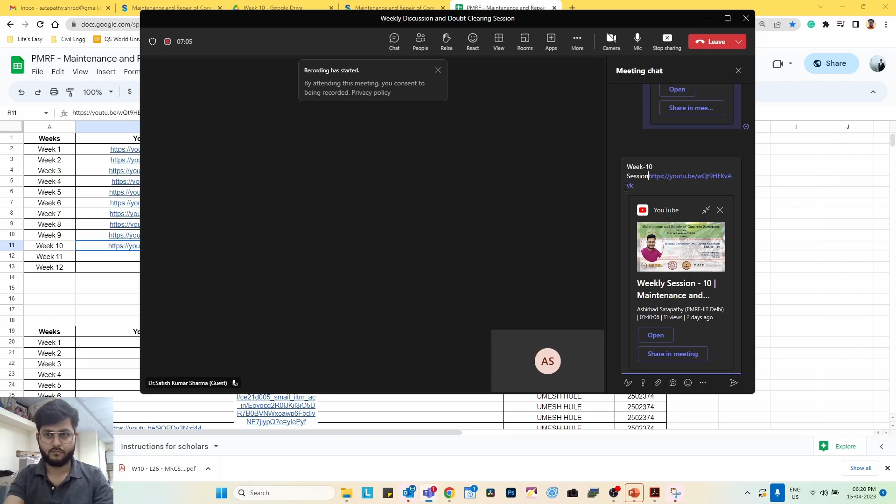Hello, Dr. Satish. Sorry we are a little late to the session. I'll allow your mic, just give me a minute.

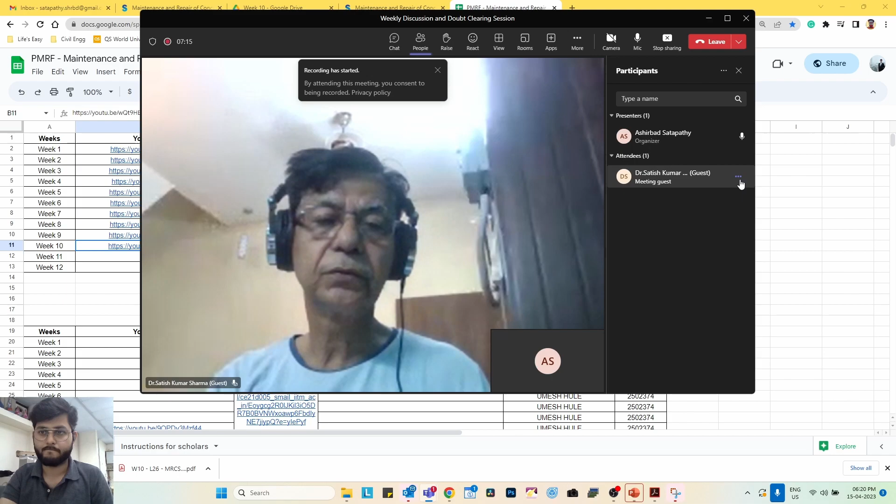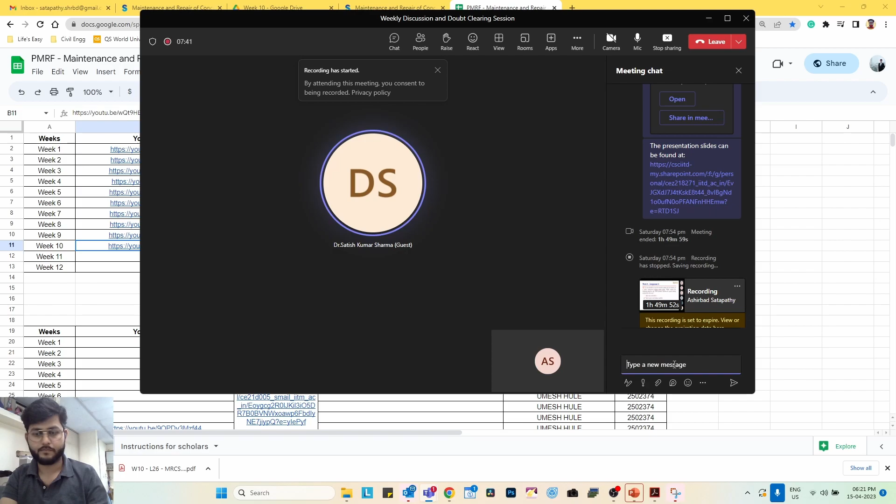Yes, Dr. Satish, I've allowed your mic. Good afternoon. Sorry we are starting this session a little late. Is my screen visible to you? Yes, visible. Okay, I'll start right away.

This is basically meant for transfer of high vertical shear loads, so the first option is correct. The second one is not correct because vertical movement cannot be allowed. They prevent excessive stress in the slab by allowing independent longitudinal movements - yes, individual longitudinal movement doesn't disturb us. They prevent excessive stress in the slab by restricting independent movements. So these two answers are correct.

This is the typical schematic representation of a dowel shear bar that is given between two successive concrete castings. So basically, dowel shear bars are a form of expansion joints.

In concrete pavements, there are three major types of joints. One is a contraction or control joint. As the name suggests, in a control joint we control the location of cracking. Saw cuts or tool cuts are given to reduce the cross-sectional area, so that the crack occurs at these locations - cracks are allowed at joints.

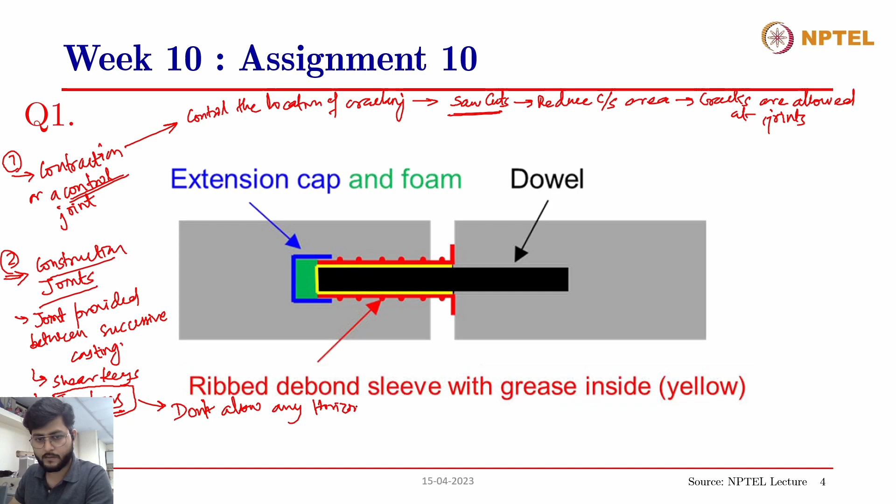Tie bars, since this is a construction joint, don't allow any horizontal or vertical movement. They prevent any differential settlement or differential movement between the successive cast members. Tie bars are simply ribbed, high yield strength bars provided between two successive elements, and they act as construction joints. The third typical type of joint provided is an expansion joint.

An expansion joint allows for movement in order to release stress. Whenever stress builds up inside the concrete due to environmental variations, like shrinkage or temperature variation causing thermal stress, we provide these kinds of expansion joints to release those internal stresses. One example is a dowel bar.

Typically, a dowel bar is what is being shown here. It allows for horizontal movement, but vertical movement is not allowed. This is a typical schematic representation of a dowel bar, and there is a ribbed debond sleeve provided around the dowel bar.

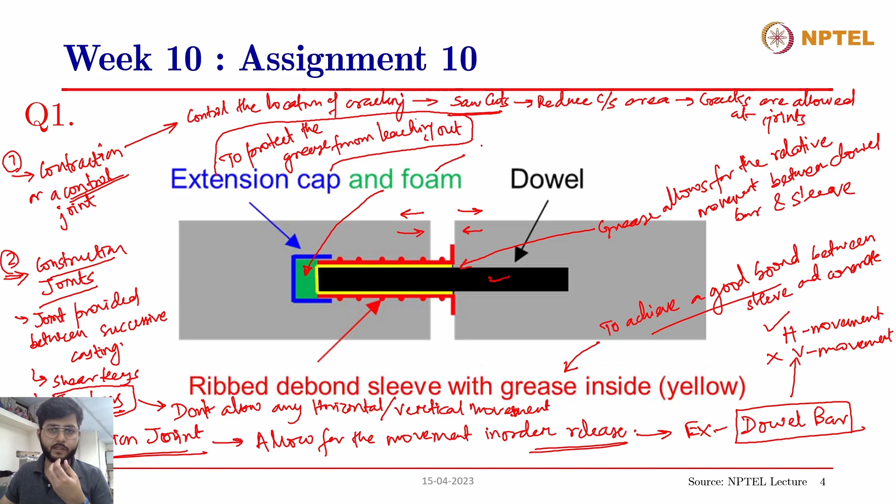Then there is a foam, this green portion, which is a soft polymeric material, like the polyurethane foams we have seen. These foams provide good cushioning beyond the rebar, so that whenever there is expansion, there is sufficient space for movement, but it also doesn't leave free space so there is no entrapped air.

Otherwise, that entrapped air, when in contact with humidity, would affect the rebar and cause corrosion. So to avoid leaving that portion empty, we apply a foam, an elastomeric material rather than a stiff one. It allows for relative movement while filling the gap, so there is no air or humidity present at that location - allowing movement while restricting humid air. This is the role of the foam.

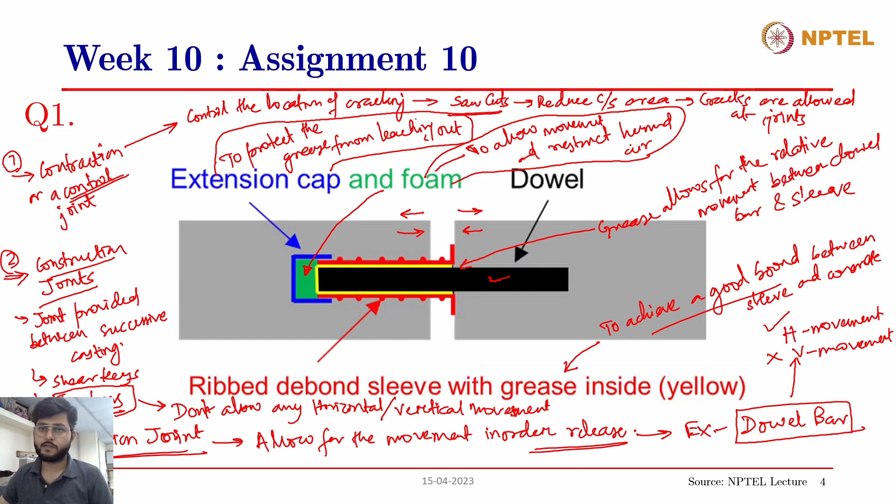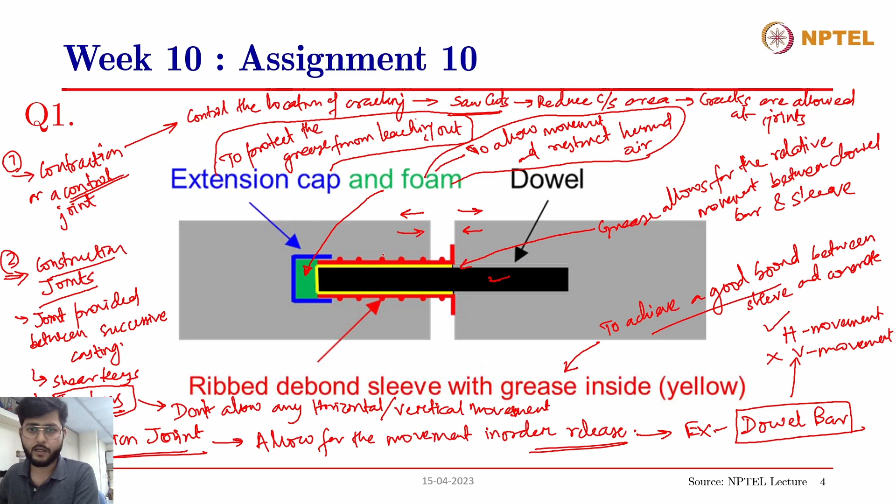So this is the typical representation of a dowel and the functioning of a dowel bar. They transfer the high vertical shear loads because they don't allow for vertical relative movement, and therefore the stresses built up due to the application of loads are shared uniformly between both the different concrete elements.

Yes, so this is a true answer. They don't allow the vertical movement. As Dr. Satish also mentioned, this is a wrong answer. They don't allow for the vertical movement.

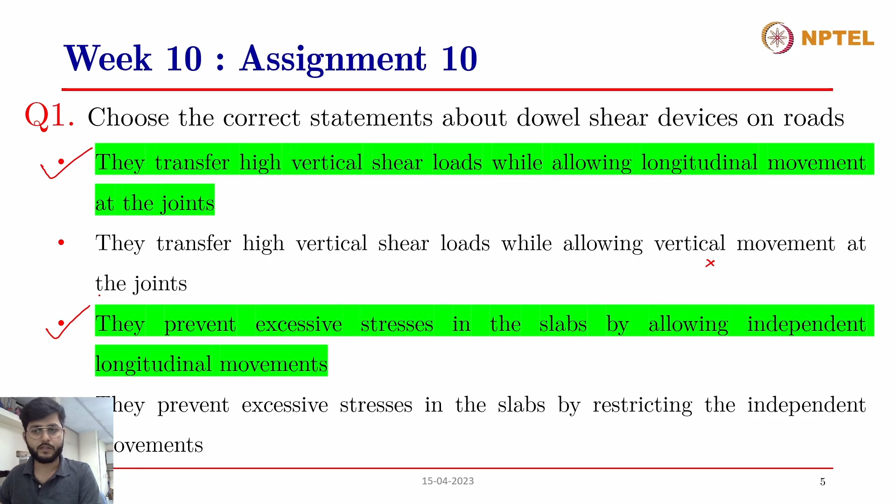They prevent excessive stresses in the slabs by allowing independent longitudinal movements. Yes, they are expansion joints, and therefore they're provided at the expansion joints, and they allow independent longitudinal movements. They don't restrict the independent movements, so this is a wrong answer.

All right, moving to the second question. As per the lecture, what are the key mechanical and durability features of a good dowel shear device? I guess we have covered most of it. Dr. Satish, do you want to answer this question? The options given, yes, you can answer this.

It has to be corrosion resistant, first requirement. Then, as discussed in the previous question, ribbed plastic sleeves with grease inside. Yes, this is common to question number one also. Ribbed dowels, no, that's right, not the intention. Parallelly aligned dowels with minimum tolerance. Yes, that is also correct. Thank you, Dr. Satish.

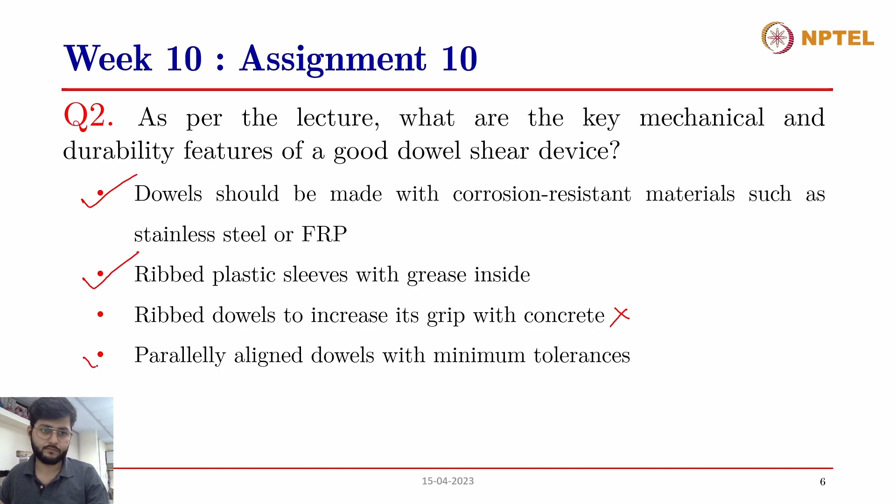So the correct answers to these questions are these three answers actually. The first statement is dowel should be made with corrosion resistant materials such as stainless steel or FRP, because we don't want the dowel bars to get corroded. Otherwise, if these rebars get corroded, corrosion products will form around them, creating expansive stresses within the concrete, and that will further create cracking.

So if I'm looking at a plan of an expansion joint, and this is a typical expansion joint with these dowel rebars, if corrosion occurs, then there will be longitudinal cracks across these rebars, and that will affect the concrete. That will further allow the ingress of water and other substances into the concrete, leading to deterioration. These are corrosion cracks.

We do not want that, and therefore we want the dowel bars to be made out of corrosion resistant materials like stainless steel or FRP bars.

Then the second thing, as we discussed, ribbed plastic sleeves with grease inside. Ribbed plastic sleeves provide bond with concrete, and grease inside lubricates and allows movement of the dowel rebar. We do not want ribbed dowels.

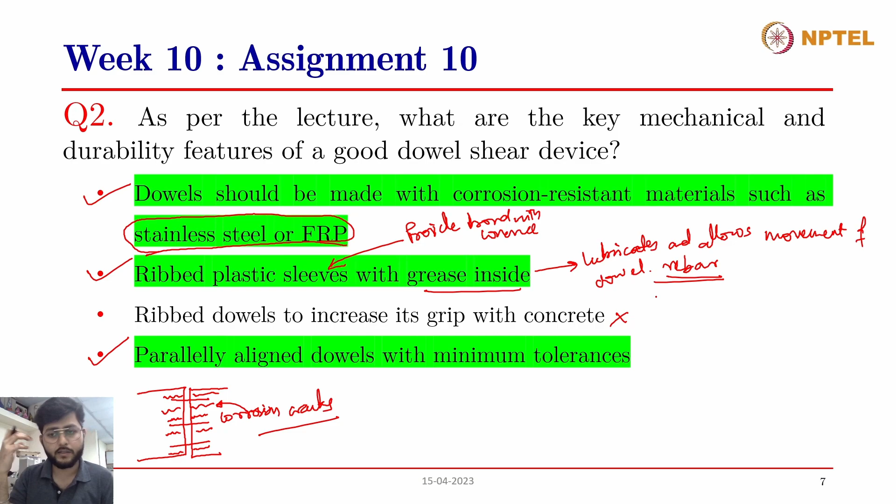These rebars are not ribbed because if we provide a ribbed dowel, those ribs will act as shear keys, providing shear resistance and a good bond strength with the concrete. They'll increase the grip, as mentioned, and we do not want a good grip between the dowel rebars and the ribbed sleeve, because we want to allow for the longitudinal movement of the rebar in the expansion joint. Therefore, we do not want ribs.

Rather, the dowel rebars, if made out of stainless steel, should not contain any ribs. They should be plain and smooth in nature, so that they will allow for good relative movement between the two concrete elements. So this is a wrong statement.

And finally, the last statement is parallelly aligned dowels with minimum tolerances. Yes, the ribs, when they— again, this is a plan we are looking at, and if this is a construction joint, the rebars should be parallel to each other.

It should not be in a skewed manner, because that will prevent uniform stress distribution. Skewed alignment should be avoided, and the tolerances, the pitch or the gauge length between the rebars, should be sufficient and minimal, so that the rebars are provided at sufficient spacings, structurally capable of allowing uniform stress distribution between the two successive concrete elements.

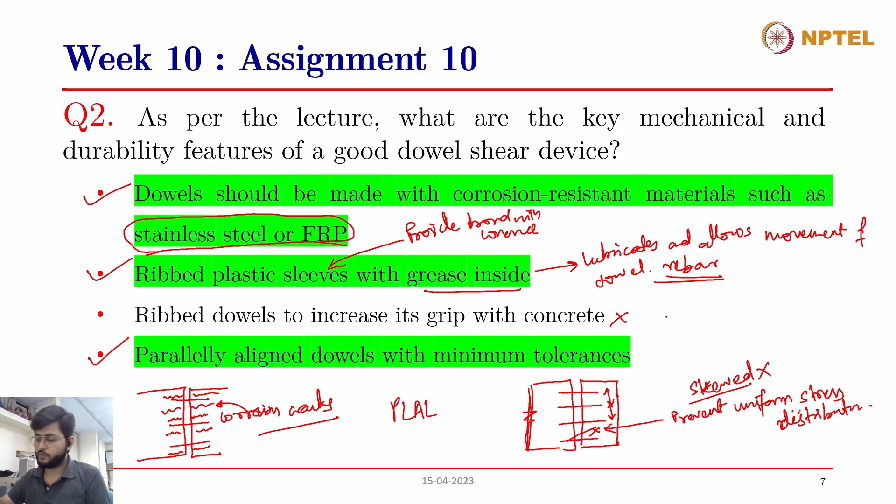Therefore, these three are the correct answers. All right.

Moving on to the third question, the figure below shows the repair work carried out on the concrete surface and the elastomeric bearing pad between the girder and the column of a bridge. Select the most relevant inference from the following options.

And this is a concrete girder, and this is the concrete column, and this is the elastomeric bearing pad.

The options given are: the repair enables the bearing pad to carry the compressive and shear stresses; the bearing area seems less than the top surface area of the columns, which may lead to stress concentration beneath the pads; the bearing pad is flexible and its functionality is not affected by the repair work. Which of these statements is correct?

The second one is correct, because it is visible here that the bearing area is much lesser than the area of the column top. So it will lead to excessive stresses, stress concentration. They are asking for only one answer, and this is the correct one.

Thank you, Dr. Satish. As we can see here, the bearing pad doesn't cover the whole bearing surface between the girder and the column, and therefore the effective transfer of stress from the girder is affected. If the stress is coming like this—let's say this is just a schematic representation—then the stress transfer will be only through the region in which the bearing pad is present, and therefore, since the area is reduced, the stress levels will increase.

This will lead to stress concentration beneath the bearing pad while transferring the load from the girder to the column, and that will lead to failure of the bearing pads. It might also cause stress concentration in the column, which might affect it structurally, causing structural damage in the column.

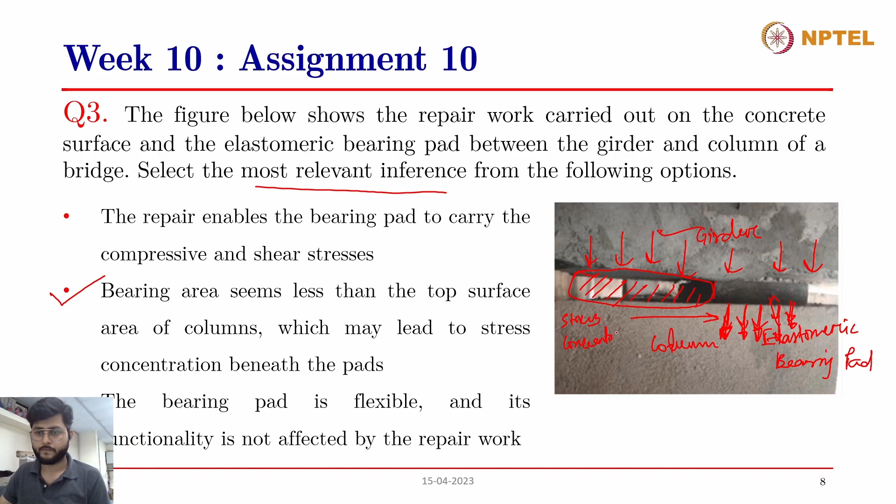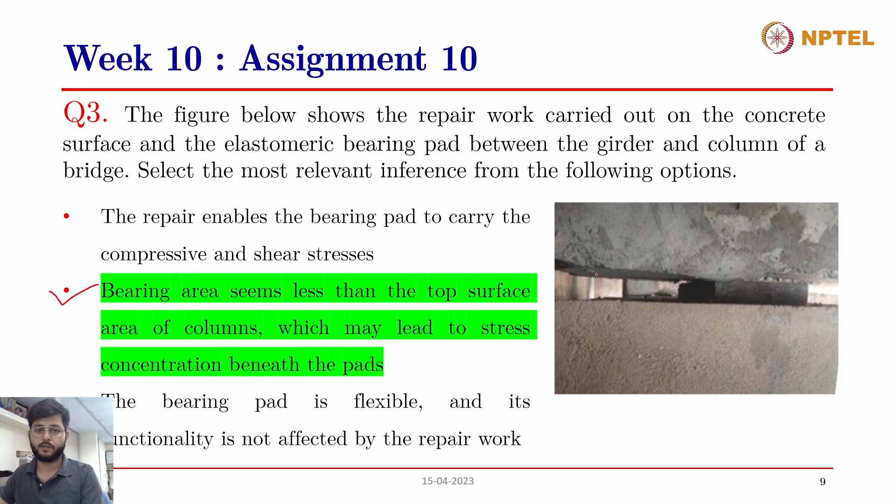So yes, this is the correct answer—the second one. The bearing area should cover the whole contact surface between the girder and the columns. The entire region has to be covered with the elastomeric bearing pad.

Moving on to the fourth question: what are the good practices to be ensured during the construction and repair of an expansion joint? The width or gap of the joint should be kept very minimal to restrict slab movements. The joints should be filled with elastomeric materials or strips. Good drainage of water must be ensured. The entry of soil or other debris into the joint spaces should be prevented.

The first one is incorrect because we want an appropriate width of the joint, neither minimum nor excessive. The joint should be filled with flexible material, so the second one is correct. Good drainage is a must, because otherwise it will cause corrosion. And the entry of physical obstructions is not desirable, so this is also correct and should be prevented.

Thank you, Dr. Satish. Yes, these three are the correct answers. The width or gap of the joint should not be kept minimal—this is wrong—because we want an appropriate gap between the two concrete elements to allow for relative movement between the slabs during rise or drop in temperature, or due to thermal or other stresses. We want to allow for expansion or contraction, so the width should be appropriate—not too less, not too high.

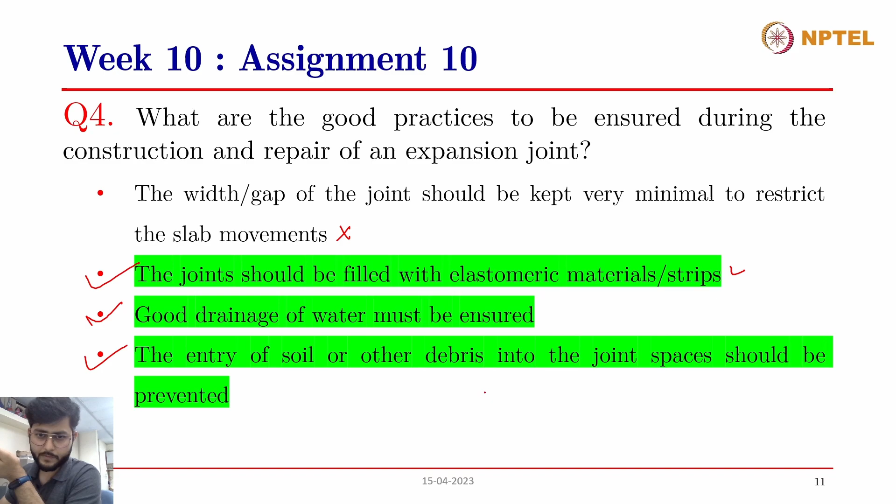I'll try to draw a typical diagram of an elastomeric strip. Let's say this is an expansion joint. These elastomeric materials come in the shape of these, running across the length of this gap, and these are the channels for drainage of water. This is the elastomeric strip.

Sometimes these elastomeric strips, apart from filling the joints and acting as good elastomeric materials to allow the contraction and expansion of the concrete, also have these morphological features, so that they can allow for the drainage of rainwater in the transverse direction.

This expansion joint should have good drainage of water, so that water does not get accumulated in these gaps. Because if water gets accumulated, it will get inside the concrete, and if the concrete is reinforced with rebars, it will corrode the rebars. So we want good drainage of water; we do not want water to get accumulated in these gaps on the expansion joints.

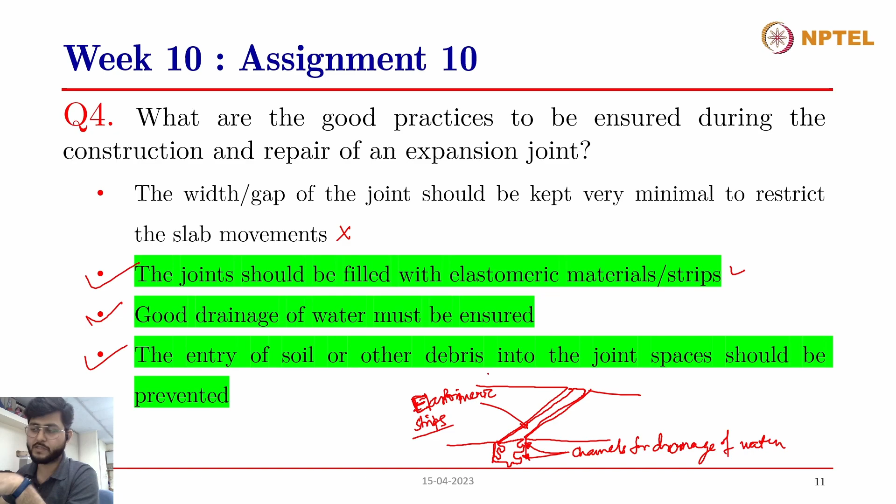The third point is that entry of soil or other debris into the joint spaces should be prevented. Because if debris or soil clog these gaps or expansion joints, that will lock the joints and prevent the concrete from its longitudinal movement. So these three are the correct answers to this question.

Moving on to the fifth question: one component polyurethane, or PU, injection technique can be used as a crack repair measure in an RC system. As per the lecture, select the appropriate choices. The statements given are: the PU compound reacts with air or water to form foam instantly; this technique can be used to restore structural cracks; this technique can be used to repair non-structural cracks. Which of these options are correct, and why?

The first one is correct because it reacts with air and water to form a foam. But it cannot impart strength; it can only act as a barrier, so it is not for structural purposes. It can fill up non-structural cracks - that's okay. But if we want strength, it is not okay; we have to go in for materials like epoxies for structural purposes.

Thank you, Dr. Satish. So these two are the correct statements actually. If it is a one component PU, basically these polymeric materials come in either one component systems or two component systems.

In the case of one component systems, they contain the polymer or the resin itself, and it only requires water or air for getting activated and hardening.

In the case of a two component system, there is a part A and part B. Part A is basically a resin or polymeric substance, and part B is a hardener or accelerator. These two are mixed in specific proportions - the mixing ratio has to be determined depending on the type of repair work we want to carry out. When these two are mixed, they harden and give the required hardening property that we want from this system.

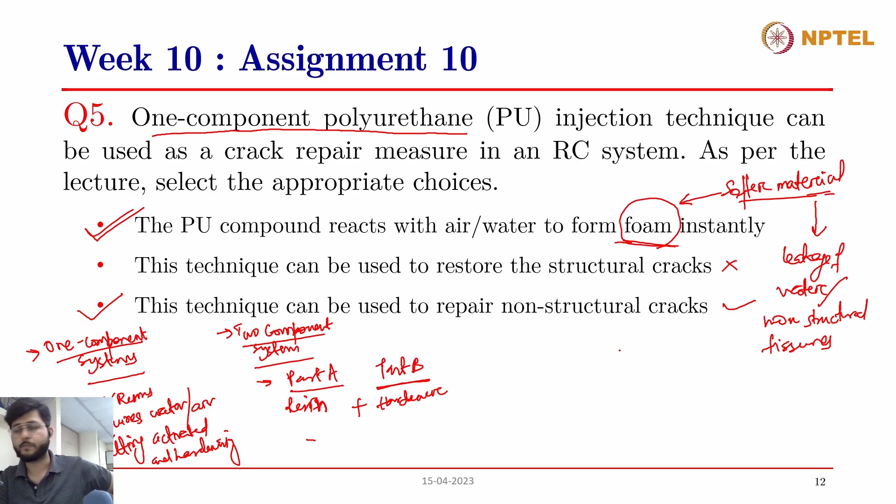If you want to carry out a structural crack repair, if there is no leakage of water, then you can directly go ahead with epoxy. But if there is a leakage of water, then you have to first stop the leakage using PU, then you can carry out the epoxy repair. So in this case, these two are the correct answers.

Moving on to the sixth question. In a pre-stressing system, gradual failure of strand could result in a shorter redevelopment length than sudden impact failure of strand. Is it a true or false statement, and why?

This is true. It was told in the lecture that in case of impact, it requires longer redevelopment length, whereas in case of gradual failure of strand, it requires shorter redevelopment length. Thank you, Dr. Satish.

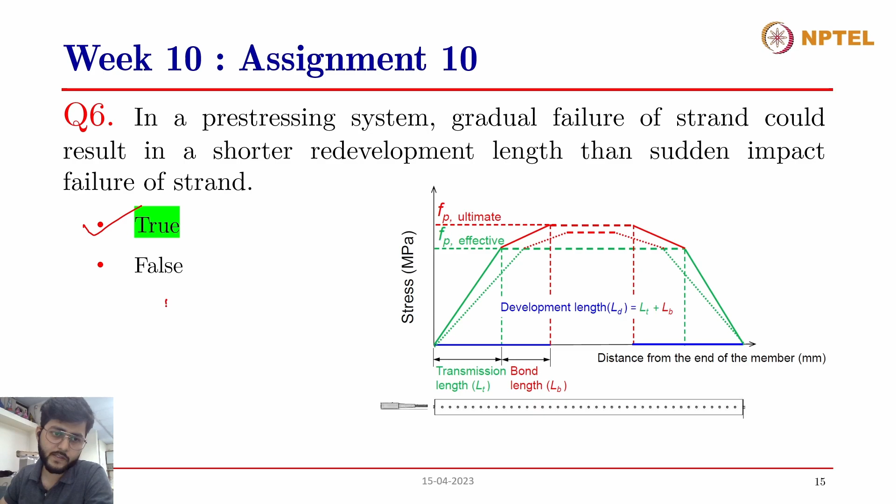So basically, what is development length, and we'll then go for redevelopment length. In case of a pre-stressing system, pre-stress is applied to the strand, applied to the steel strands.

When the stress is released, this pre-stress gets transferred. This is when the stress is applied to the steel, that is tension, and this pre-stress gets transferred as compressive stress in concrete.

Now, when this pre-stress is getting transferred from the strand to the concrete, if we look at this typical longitudinal section of a pre-stressed element, and if this is the end of the pre-stressed element, then the length required for the effective transmission of the pre-stress from the steel strand to the concrete is known as the transmission length. So in this length, the stress starts to get transferred from the end of the member, and at this length LT, the transmission length, the whole of the pre-stress has been effectively transferred to the concrete.

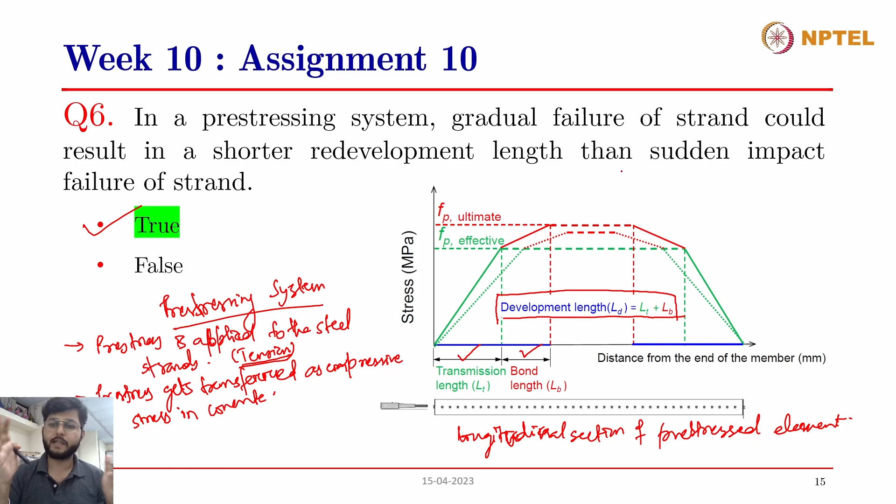Whenever we are carrying out repair work in the pre-stress system, the pre-stress systems need to be detensioned first if there is residual stress remaining, and then we have to splice the pre-stressing strands. Sufficient redevelopment length has to be provided, and proper calculations have to be done so that the stress can be effectively transferred from the strand to the concrete.

It has been observed, as mentioned in the lecture, that in case of a sudden impact failure, the redevelopment length required will be longer than in case of a gradual failure of the strand, let's say due to corrosion or other deterioration mechanisms. If there is a gradual failure, the redevelopment length required during repair will be shorter compared to a sudden impact failure, due to an accident or other damage mechanisms like environmental loads, earthquake, or other natural calamities. So yes, this is a true statement.

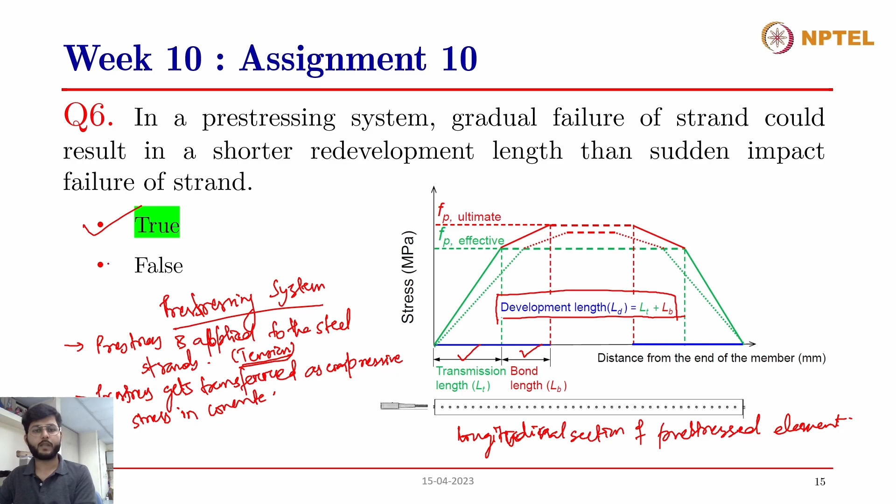Moving on to the seventh question. As per the lecture, select the correct methods of detensioning of tendons: jackhammering behind the anchorages, drilling into strand, burning through the strand. It was told in the lecture that jackhammering is not allowed, and the other two are suggested - we can drill into the strand, we can burn through the strand also. So second and third are correct.

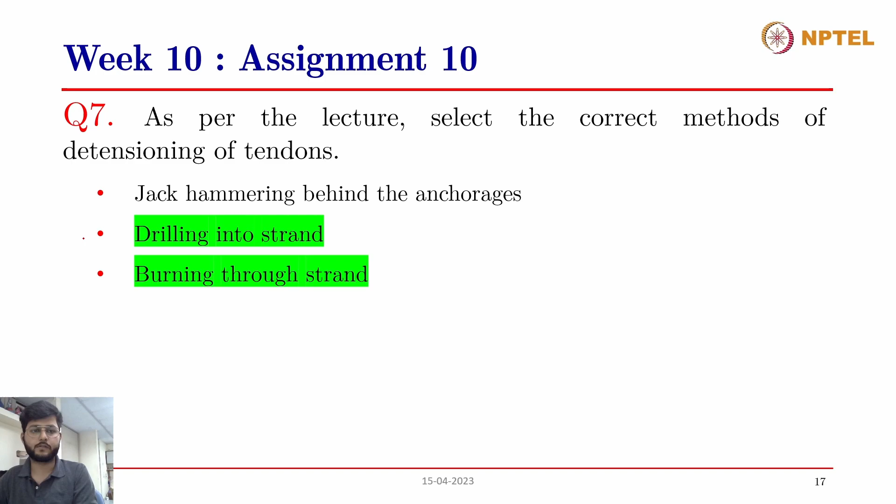Yes, as per the codal provisions, jackhammering behind the anchorages is not allowed for detensioning of tendons. Whenever we are carrying out replacement of tendons, or splicing of pre-stressed tendons, we have to first remove the residual pre-stress already present in the tendons - this process is known as detensioning of tendons. This has to be done by two options only. One is drilling into the strand - by drilling, you're reducing the cross-section area and therefore detensioning the tendons. The other is burning through the strand - by burning, you're increasing the temperature, which reduces the pre-stress and detensions the tendons. So these two methods are acceptable.

All right, this ends the week 10 assignment 10 problems. We'll again discuss the week 11 assignment 11 problems. The answers to this assignment have already been submitted by you, and the deadline is over, so we can discuss this.

The first question of this assignment was: the photo below shows the repair work conducted to strengthen the column of a commercial building. Observe the photo and select the correct choices. Note CFRP is carbon fiber reinforced polymer. The statements are: CFRP bands are wrapped to enhance the shear strength of the column; CFRP anchors are used to prevent delamination or debonding of the laminates; near surface mounted cut and CFRP inserts are provided on the column to improve its compressive strength; L-shaped CFRP laminates are provided at the top to enhance the punching shear resistance of the slab; L-shaped CFRP laminates are provided at the top to achieve sufficient junction development for adequate load transfer from the slab to the column. Which of these statements are correct?

First one is correct - wrap to enhance the shear strength of the column. Then prevent delamination, yes, anchors are to be used. Then this near surface mounted cut appears to be glass fiber and not CFRP. So the L-shaped one for punching resistance - you have to provide extra depth, so that is not the case. The last one is correct because for junction development, CFRP laminates were suggested in the lecture.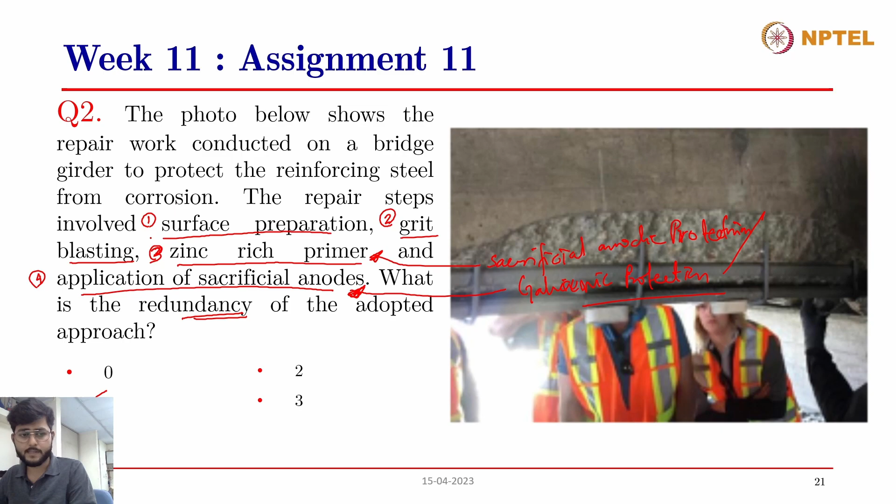However, for sacrificial anodes, these are specifically designed systems, and we can actually predict the lifespan of these sacrificial anodes. The number of anodes can be directly calculated as per the current demand of the concrete. Since these two systems are both cathodic protection systems that act as sacrificial anodes providing galvanic protection, the degree of redundancy is 1 here, because if one is already provided and protecting the steel rebar, an additional protection system will act as a redundant system.

Answer is 1. The third question was: as per the lecture, an instantaneous corrosion rate of less than 1 milliampere per meter square indicates that the steel is passivated. Is it true or false? It's a straightforward question. It is true.

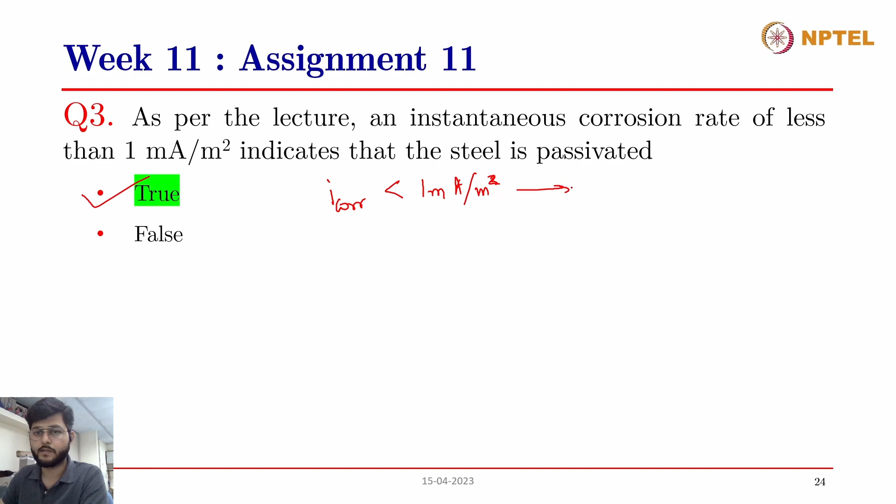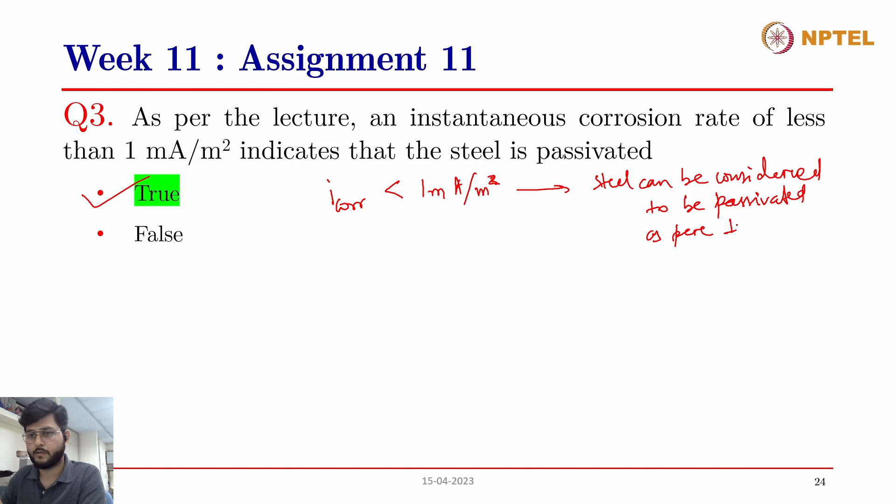As per ISO guidelines, as told in the lecture, if the corrosion current generated is less than 1 milliampere per meter square, we can call it a passive state of steel. So it is true. Thank you, Dr. Satish. Yes, this instantaneous corrosion rate, or icorr, if less than 1 milliampere per meter square, then the steel can be considered to be passivated as per ISO guidelines. So this is a true statement, right?

Moving on to the fourth question. Select the long-term characteristics expected from an adequately done repair using sacrificial anode cathodic protection system in reinforced concrete structures. Refer to this as SACP. The statements given are: it should supply high current density throughout the design life, irrespective of the demand from the reinforcement; it should be self-regulating; it should favor the passivation of the embedded steel reinforcement; it should favor the passivation of the sacrificial anode metal, which is zinc. Which of these statements are correct, and why?

Can somebody answer? The first one is incorrect because current demand will be lesser with passage of time, so it should not supply high current density all the time, it should provide as per requirement. The second one, it should be self-regulating, is correct. The third one, it should favor passivation of the embedded steel, yes, that is the requirement. And it should favor the passivation of the anode metal - no, it should sacrifice itself in order to protect the steel. So the last one is not correct. So the middle two are correct. Thank you, Dr. Satish.

Yes, the correct answer is that sacrificial anode cathodic protection systems are basically zinc-based anodic sacrificial anode systems, which are embedded in an encapsulating mortar, or a highly alkaline cementitious mortar, which provides an alkaline environment beyond a pH of around 13, so that it allows the zinc to get corroded. These are in direct connection with the steel rebar, so there is no external voltage applied.

Rather, these sacrificial anode metal systems are self-regulating, so as per the current requirement from the steel reinforcement embedded inside the concrete, these sacrificial anode cathodic protection systems can get corroded and supply for the current demand. They'll meet the current demand of the reinforcement with the due passage of time.

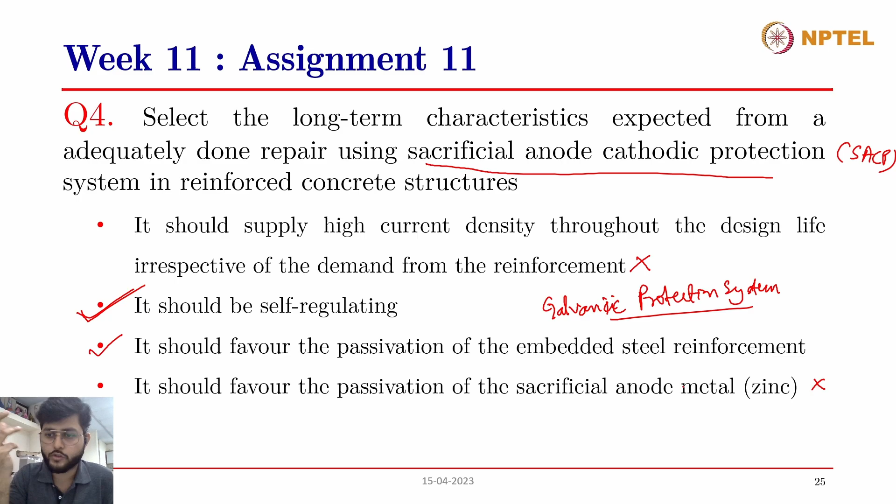It should favor the passivation of the embedded steel reinforcement, because this is essentially a galvanic protection system. This means a highly reactive metal, zinc in this case, will get corroded, while a lower reactive metal, steel, will be protected and act as a cathode, while zinc acts as an anode. So the pitting or corrosion will occur in zinc, while the steel will remain intact and protected, having a good passivating film around it so that it remains protected from corrosion.

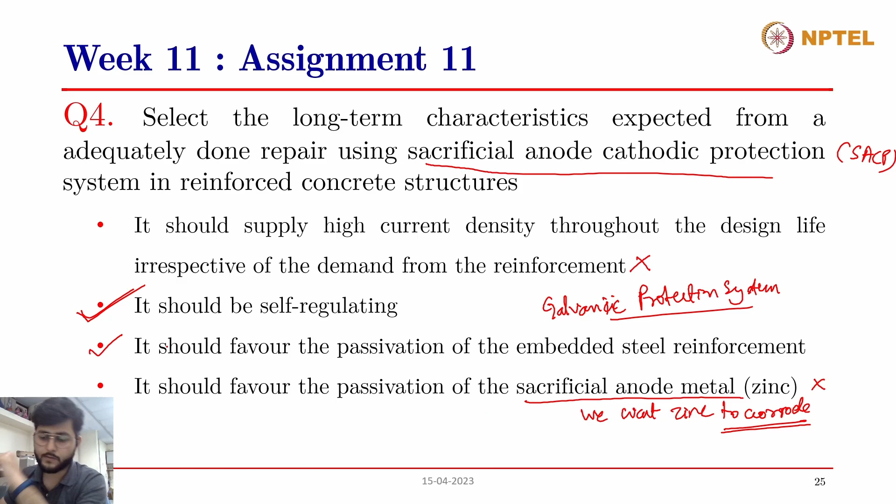So yes, the third statement is true, and the fourth statement is wrong, because we want the depassivation of the anode, the zinc metal, so that it acts as an anode and gets corroded. We want zinc to corrode so that it acts as a sacrificial anode. So it should not favor the passivation of the zinc metal - this is a wrong statement. The correct answers are these two statements.

Moving on to the fifth question. This is probably the last question of this assignment week. This is a short assignment. Select key features of a good galvanic anode system for applications in concrete structures.

Anode tie wires should be die cast into the anode metal. Highly alkaline encapsulating mortar to ensure continued corrosion of zinc anodes. Encapsulating mortar with disconnected pores, and a large surface area of the anode metal to meet the high current demand.

Which of these are correct? This question has been asked again - it was asked earlier in another assignment. We had discussed something related to this previously. Yes, anode tie wires should be die cast - this is a repetition, same question as before. It was told in the lecture also - highly alkaline encapsulating mortar to ensure continued corrosion, yes, we require an alkaline environment with pH greater than 13 or so for zinc, so that zinc keeps corroding. Disconnected pores are not desired, because corrosion products require some space, and disconnected pores may not be sufficient to accommodate the voluminous products. Then large surface area of the anode metal to meet high current demand - yes, that is also correct. So the third answer is not correct, others are okay. Thank you, Dr. Satish, yes, you have rightly answered.

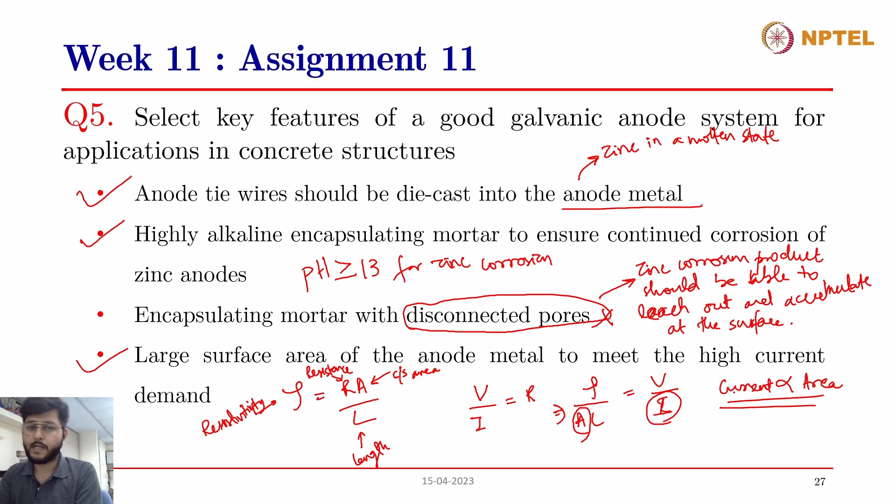So these three are the correct statements, right?

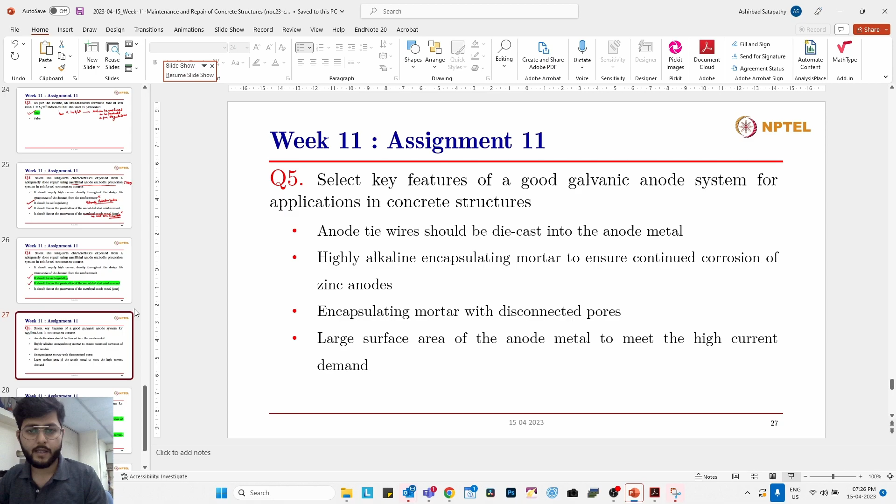Well presented. Thank you. Thank you, Dr.